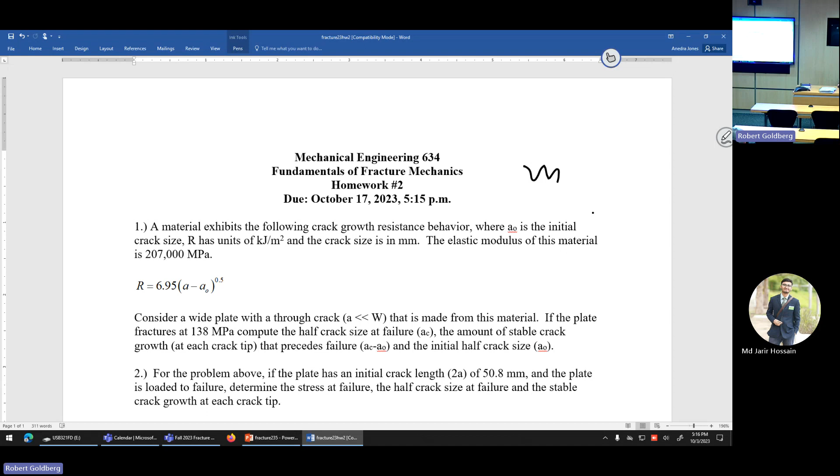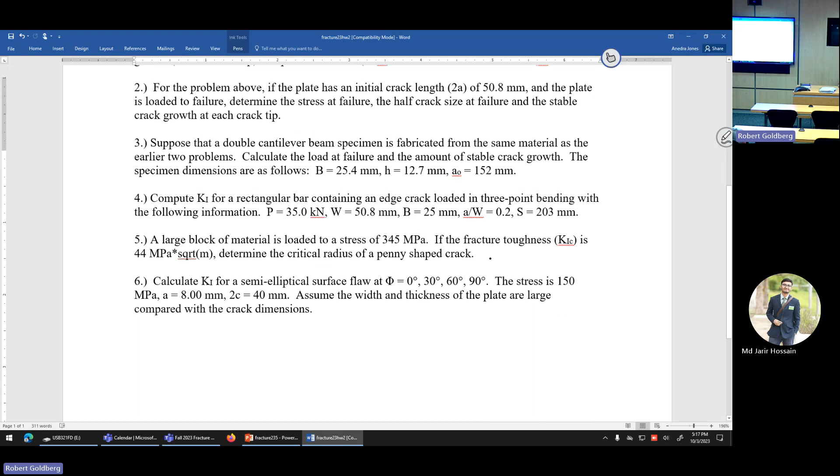I have handed out your homework, due 2 weeks from today. The first couple of problems deal with the R curves and the R ratio we talked about last week. Problems 4 through 6 will be on the stress intensity factor, covering the material related to stress intensity that we'll be discussing today.

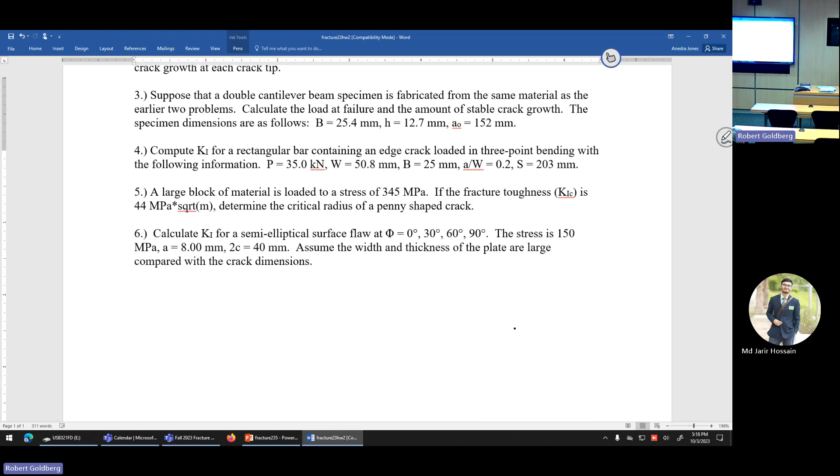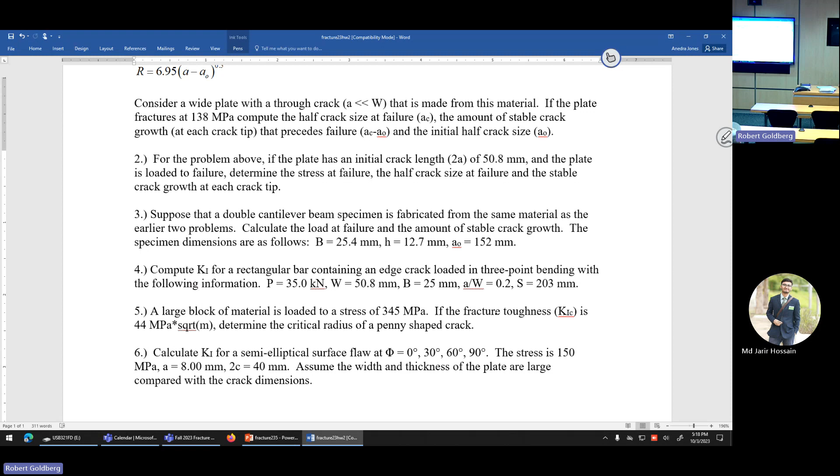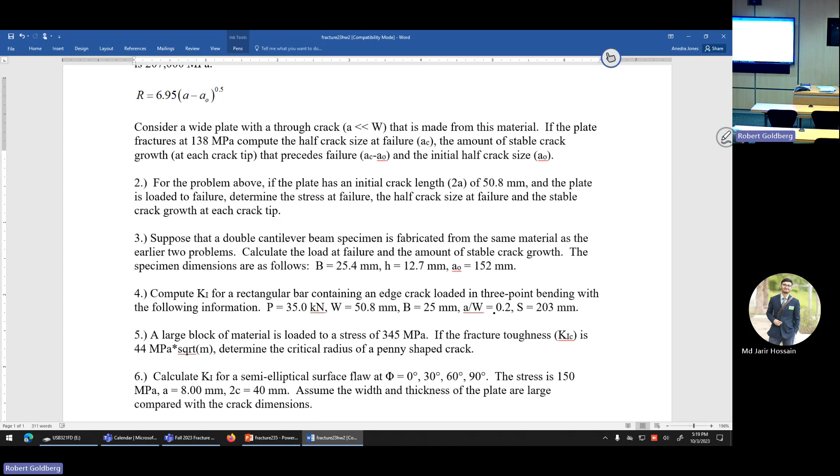In any case, it'll just be the material on the first 2 homeworks covered on the midterm, because I never give test questions on material that you haven't done homework on. Since I'm basically teaching 2 classes, one class's midterm will be the week of the 23rd, the other the week of the 30th. I'm still deciding which will be which week. So for tentative planning, figure the 24th or the 31st will be your midterm. Start checking your calendars, and next week we'll set the date. If someone has business travel or whatever, we will work around it.

The midterm will be during the class period, and even though the class period is 2.5 hours, it won't be a 2.5 hour midterm. The midterm will only be about an hour and a half, maybe an hour fifteen. Also, that will be all for that week - I won't make you sit through an hour lecture and then have to worry about taking a midterm too. That's just not fair.

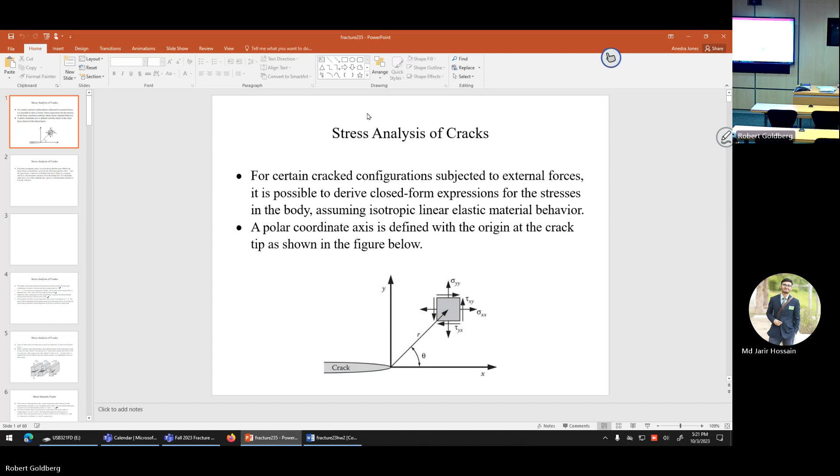Last week we talked about the R curve and the conditions that lead to stable or unstable crack growth. Today we'll be talking about stress analysis of cracks.

For crack configurations subject to external forces, it's possible to derive closed form expressions for the stresses in the body. Like pretty much everything this semester, we're going to assume isotropic linear elastic material behavior. We'll do most of our work in the Cartesian system, but we'll deal a little bit with the polar coordinate system.

We define a polar coordinate axis with the origin at the crack tip, and define any point around the crack at some angle theta from the horizontal, at some distance r from the tip of the crack. For a point at angle theta, distance r, we can define our stress state. Depending on how we apply the loads, we can have a fully populated stress tensor with normal stresses in both directions and in-plane shear stresses.

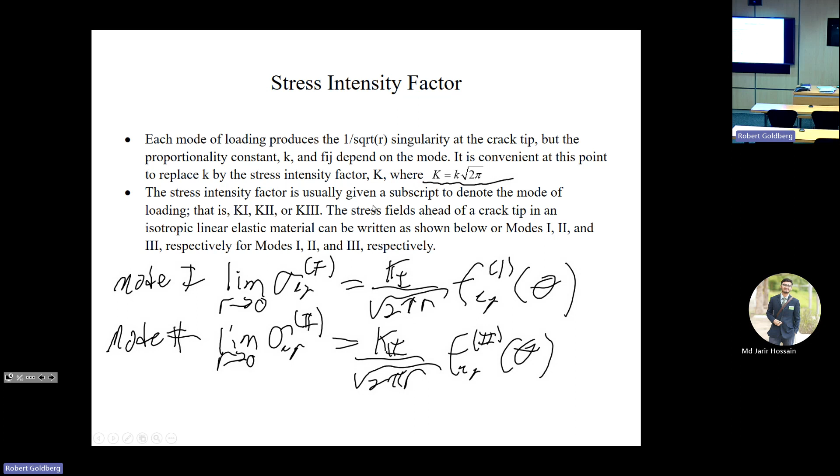And then finally, for mode 3, we have the limit as the radius goes to 0 of the stress associated with mode 3 loading is equal to the mode 3 stress intensity factor divided by the square root of 2 times pi times the radius, times our function of theta appropriate for mode 3.

We say the limit because, as we'll show shortly, these stress expressions around a crack are only valid in the region right around the crack. At some distance away, the crack loses its influence and you just have the far field stress that you apply to the structure.

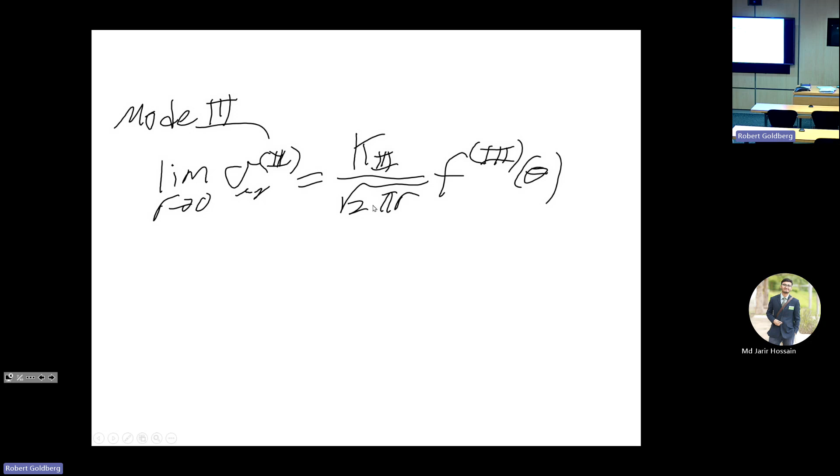For a mixed mode problem where more than one loading mode is present, the individual contributions to a given stress component can be added together. So the total stress is equal to the stress from mode 1 plus the stress from mode 2 plus the stress resulting from mode 3. This is due to the idea of linear superposition—so if you have a multi-axial stress state applied around the crack, you can just take the stress contributions from each of the various modes.

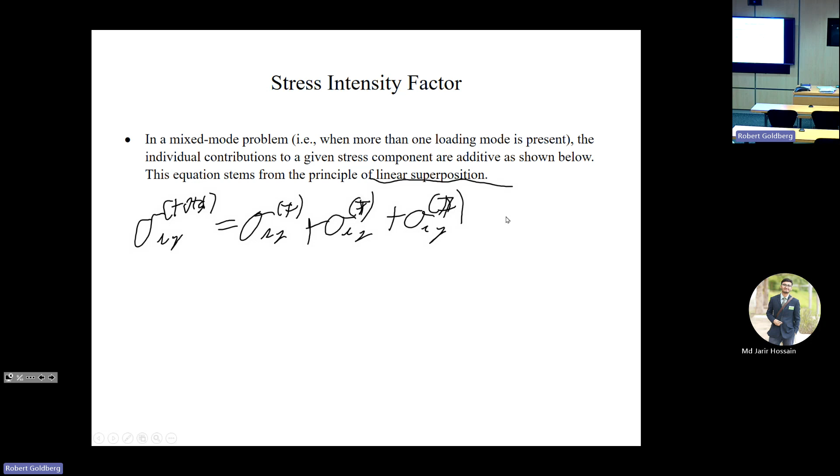So how do we define these stress expressions? This depends on the various modes. The singular stress fields are in Cartesian coordinates, so we can define detailed expressions for the stress in the x direction, the stress in the y direction, the in-plane shear, and—because this is plane stress—the out-of-plane stress is 0 for plane stress, or the sum of the stresses multiplied by the Poisson ratio for plane strain. Our transverse shear stresses are 0.

For mode 1, the stress in the x direction is this expression here: K over the square root of 2 pi times the radius, times our function of the angle theta. And we have similar expressions for the y stress and the shear stress.

For mode 2, we have the various expressions for the stress due to mode 2 loading, and all of these still have that stress intensity factor over the square root of 2 pi times the radius, but the functions of the angle are different.

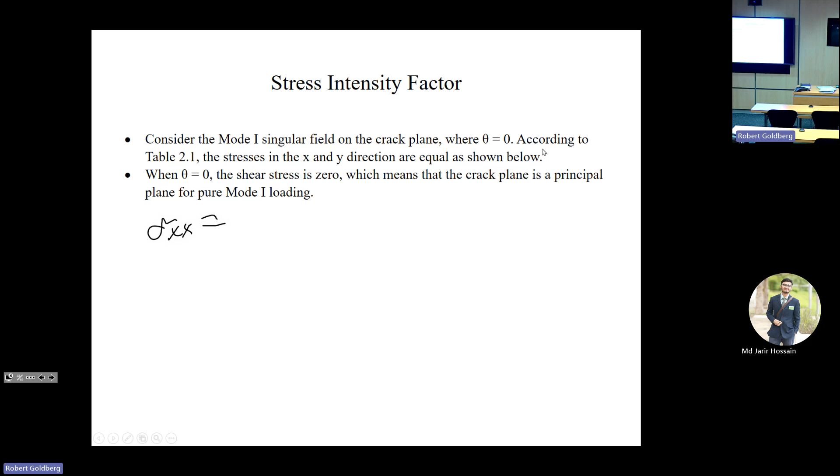So what we have for the special case when theta equals 0 is that our stress in the x direction is equal to our stress in the y direction, and it's just equal to the mode 1 stress intensity factor divided by the square root of 2 times pi times the radius.

And for the shear stress, if we look here, we have sine of 0 is 0. And these are all just multiplicative, there's no one term in here. So when theta is equal to 0, these two terms are 0, which means this whole term is 0. So right around the plane of the crack, we have that our shear stress is equal to 0.

So if we go back to our original here, right along the plane of the crack, if we go back to our little element with the various stresses applied, the x direction and y direction stresses are equal to each other, and the shear stress here is 0.

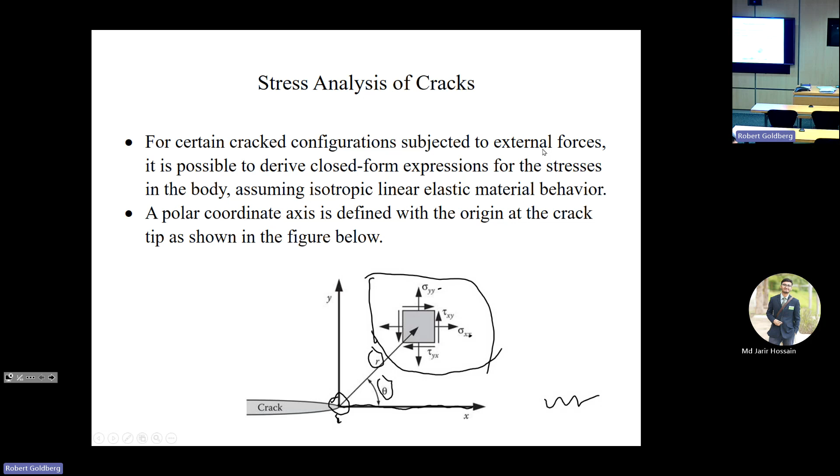So what that also means is, remember when we talked about our review of elasticity theory, we talked about principal stresses as the case where we just have normal stresses and our shear stresses are equal to 0. So what this means is the crack plane, under pure mode 1 loading, is a principal plane. We only have normal stresses, we don't have shear stresses.

Now what we talked about a little bit ago is that all these things we're doing with our stresses, they're only true right around the crack tip. Because if you look at the fundamentals, the stress intensity factor divided by the square root of 2 times pi times the radius, well, when the radius gets big, this term here gets close to 0, so it doesn't contribute things anymore.

So the idea is you have, way out at some infinite distance, some applied stress. So once you get far enough from your crack tip, the only stress that's relevant to the structure is just your far field stress. So the stresses far from the crack tip are governed by the remote boundary condition. So if we have a uniform tensile stress applied horizontally, in terms of this discussion, the stress approaches a constant value.

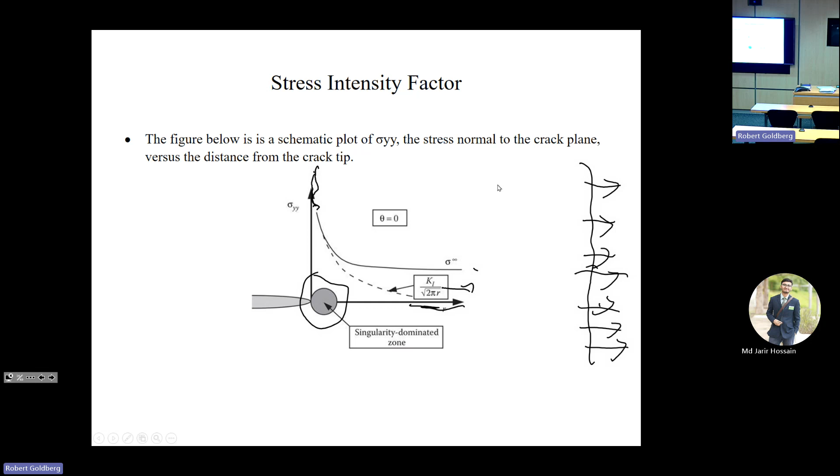It's only in this singularity dominated zone where these stresses are relevant, because this is the area where the radius is small enough that this term starts contributing to the stress. When you're far enough from the radius, your total stress equals your stress at infinity plus your stress due to the crack. It's only when you get sufficiently close to the tip of the crack where this crack term starts getting big enough, growing a little, but it's only in the zone really near the crack where this term starts to dominate and provides a significant contribution to your stresses.

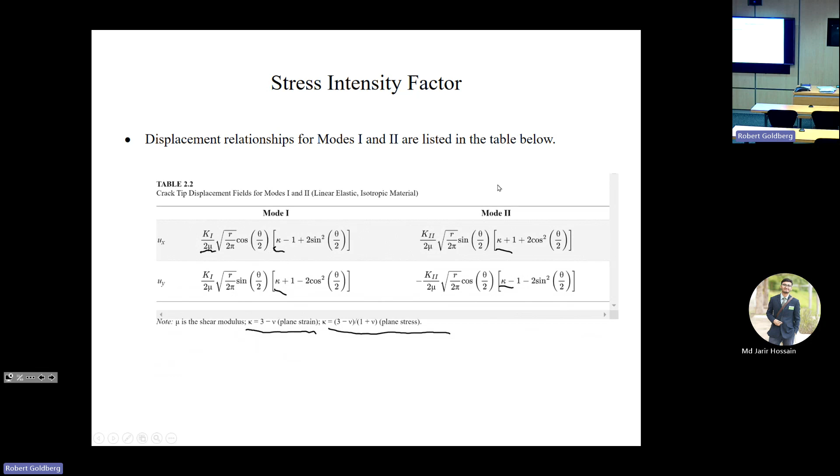So the other thing to note here is the stress - we define the singularity dominated zone, and it's defined nebulously. It's just where these various stresses that we compute using these tables grow large enough that they provide stress levels significantly greater than our far-field stress.

The stress intensity factor completely defines the crack tip conditions. So if you know the stress intensity factor, you can solve all of the components of stress, strain, and displacement as a function of the radius and the angle. The idea that you can use just one single parameter, the stress intensity factor, to completely define the stress state around the crack tip turns out to be one of the more significant and important concepts in fracture mechanics.

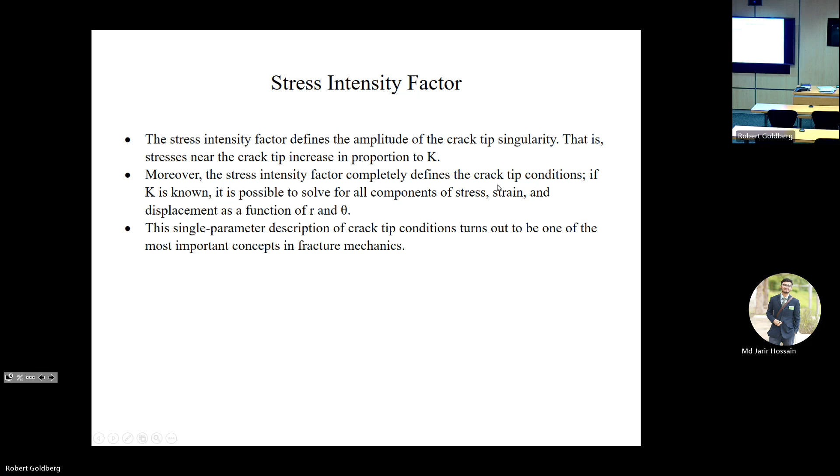So in order for the stress intensity factor to be useful, you need to be able to determine the stress intensity factor from remote loads and the geometry. Closed form solutions for the stress intensity factor have been derived for a number of simple configurations - we're going to go over several of them. Now for more complex situations, one way you can estimate the stress intensity factor is by experiment or numerical analysis.

And also, if you know the stress intensity factor for a couple simple cases, you can take your more complex case and consider it to be a combination of several simpler cases. You can use that idea to estimate your stress intensity factor.

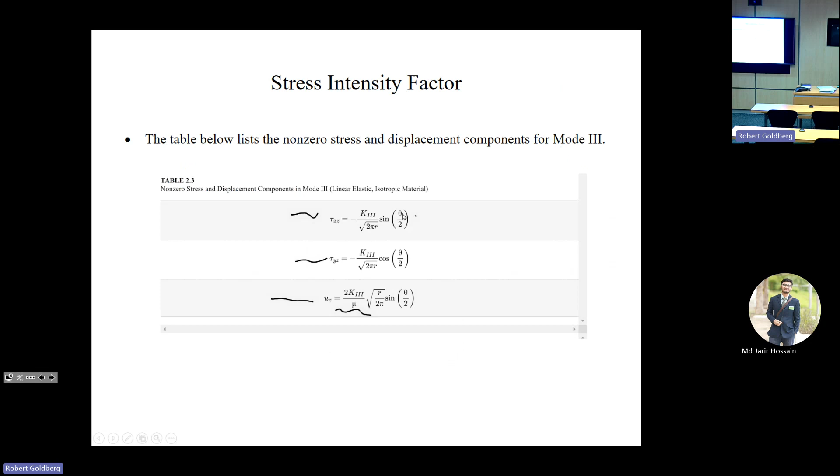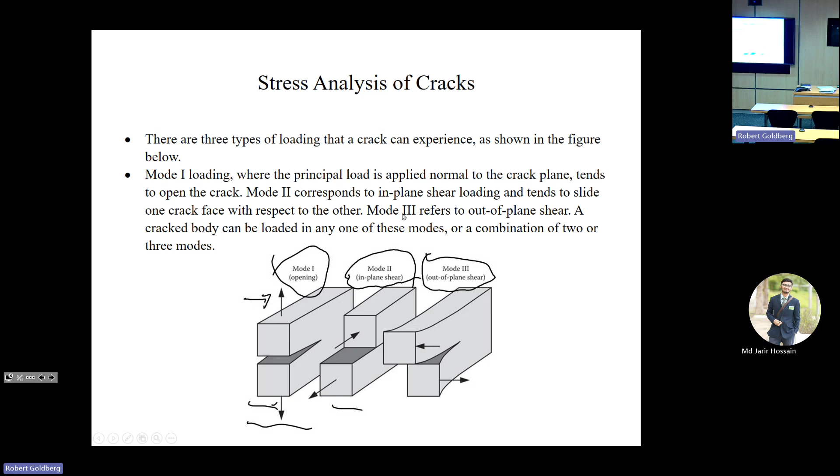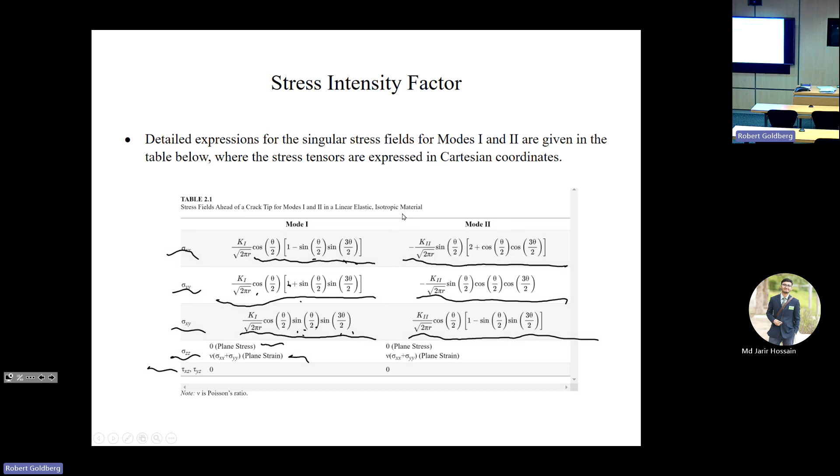And linear elastic bodies undergo proportional stressing. That is, all the stress components at all locations increase proportionally to the remotely applied forces. So as you increase your loading remotely, the stresses all increase by the same proportions, by the same ratios. So the crack tip stresses are proportional to the remote stress, and the stress intensity factor is proportional to the applied stress. If we look at how these equations are set up, the stress intensity has units of stress times the square root of length.

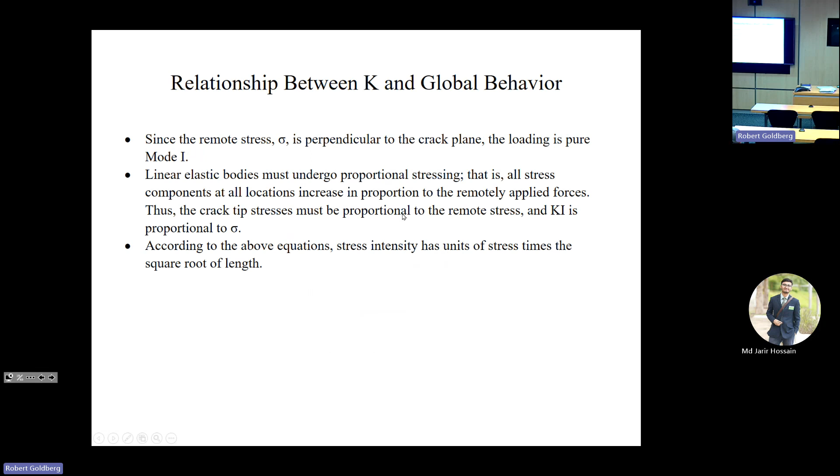So since the only relevant length scale here is our crack size, we can say that our stress intensity factor has the form: the stress intensity factor is equal to some function of the stress multiplied by the square root of the half crack length, because the only length dimension of significance here is the crack length, since we're looking at an infinite plate.

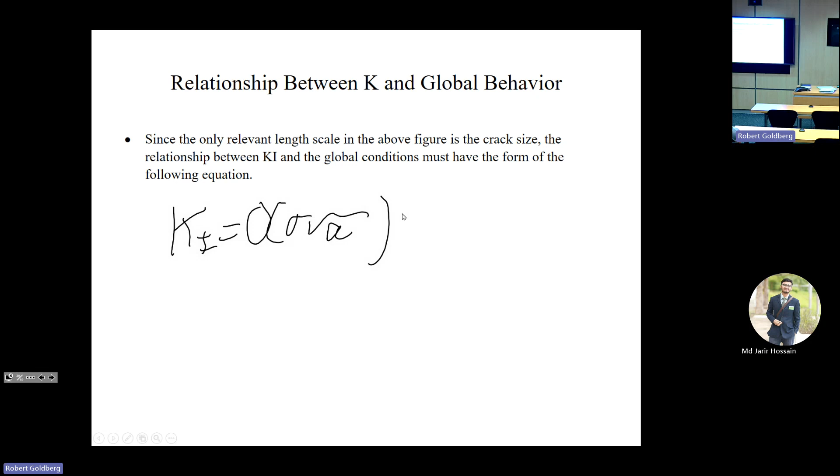So it goes off in infinite directions, vertically and horizontally, so the only length we have to deal with is the crack length, and we always just deal with the half crack length A. The actual solution for this case, which is in one of the appendices in the back of the book, goes through in lots of detail. Using that expression, it can be found that for the infinite plate subject to mode 1 type of loading, the mode 1 stress intensity factor is equal to the stress times the square root of pi times the half crack length. It's a fairly complicated derivation, but you end up with this simple expression.

So the amplitude of the crack tip singularity, the amount that the stresses are multiplied by at the crack tip, is proportional to your applied stress and the square root of the crack size, because pi is just a scalar number. For mode 2, all you do is take this normal stress and replace it with the shear stress, and you get a similar expression. So the mode 2 stress intensity factor is also just proportional to the applied shear stress and the square root of half the crack length.

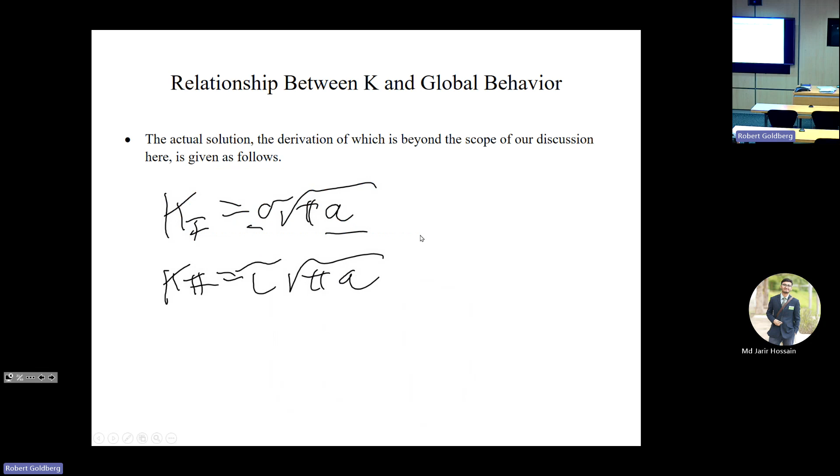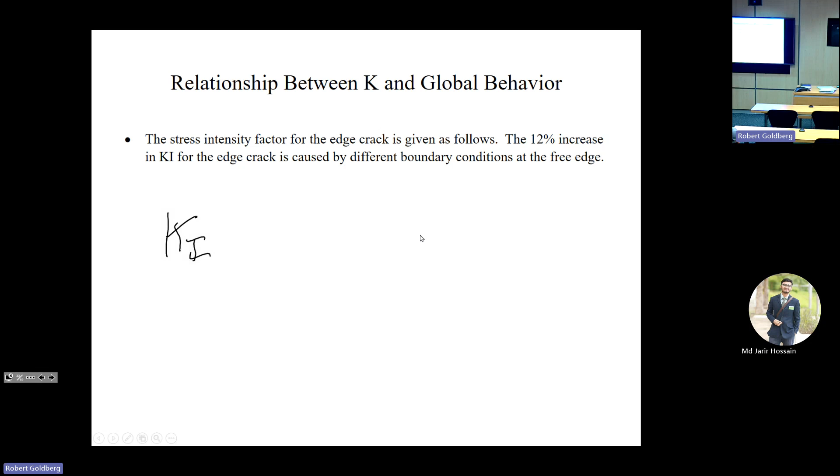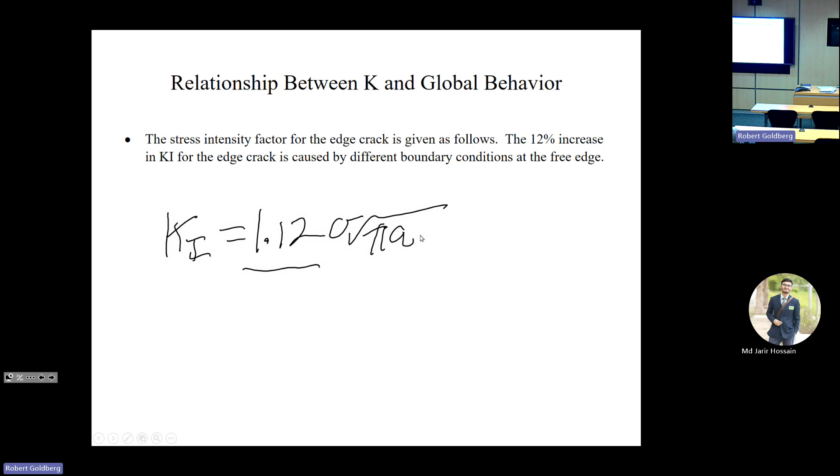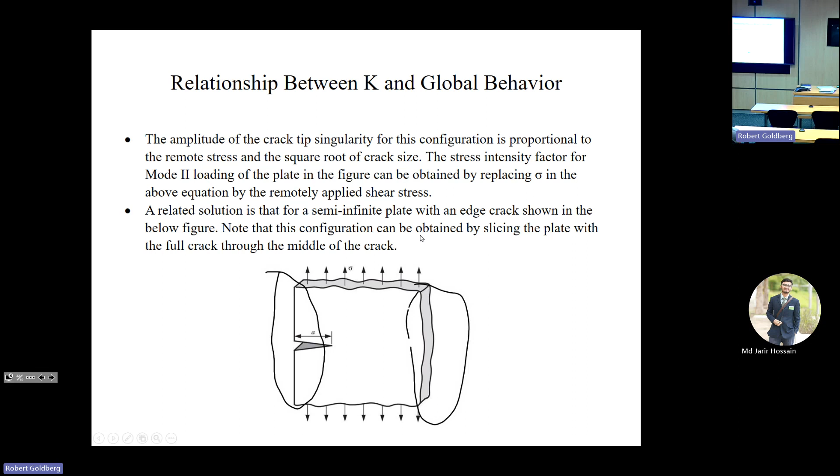You can derive this also, but it's beyond the scope of our discussion. This 12% increase, the 1.12 instead of 1, is because you have different boundary conditions at the free edge. When you have the free edge, you have edge effects which serve to focus your stresses. If you look at this figure, the free edge, because of the interplay of the boundary conditions and edge effects, opens up the crack just a little bit more.

This dotted line is the through crack. For the case of the edge crack, it's less constrained, and it just opens up a little more. So while the through crack forms a purely elliptical shape because we're not constraining this edge here, it allows it to open up just a little bit more. So that's why we get that 1.12. It seems like it's a number just pulled out of thin air, but there is a rationale behind this number.

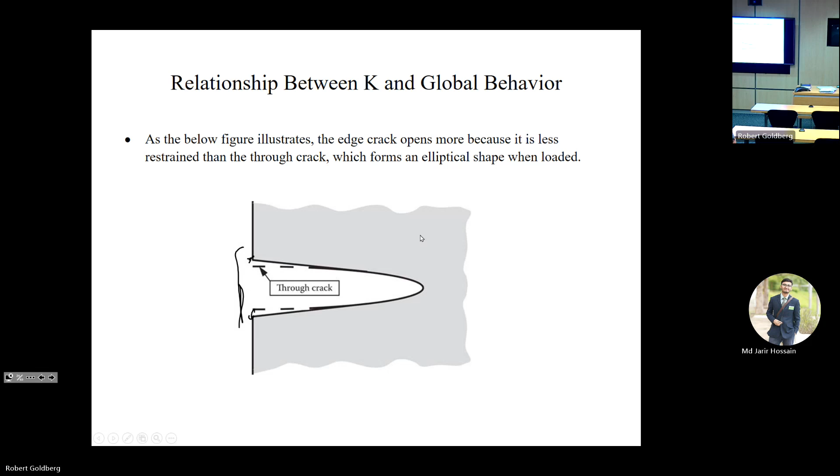Another case we're going to look at is the through crack in the infinite plate, where the normal to the crack plane is oriented at some angle beta to the stress axis. There's no reason why that can't happen. In this case, if beta is not equal to 0, the crack experiences both mode 1 and mode 2 loading.

Because if you look, we talked about these ideas when we discussed principal stresses, this idea of stress transformations, that as far as the crack's concerned, if we transform -- and always remember when talking about stress transformations, the important point is that the actual stress state is the same. All we're doing is changing our reference system.

So we have a system in terms of the crack where we have an x prime axis along the crack and a y prime axis perpendicular to the crack. Even though in our structural or global system we're still only applying this unidirectional stress in the vertical direction, as far as the crack is concerned, along this new coordinate system related to the crack, it's seeing normal stresses along the plane of the crack, normal stresses perpendicular to the crack, and it's also seeing shear stresses.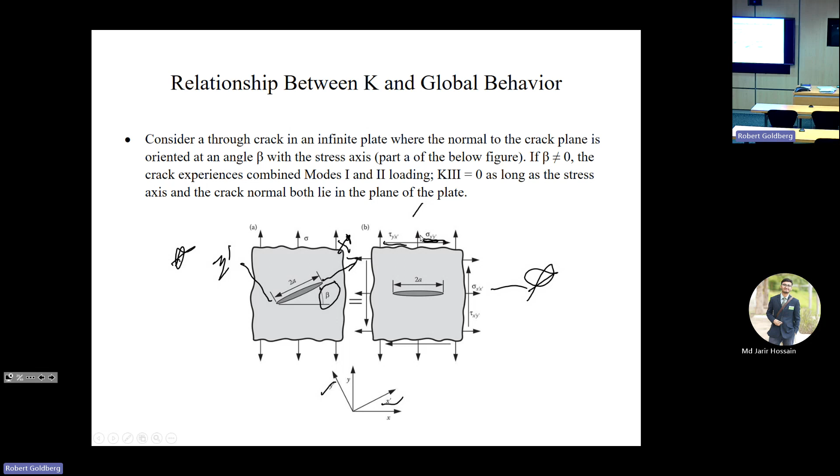So we talked about this: normal stress creates mode 1 loading, shear stress creates mode 2 loading. So the stress intensity factors for the plate - we'll relate the stresses in this rotated system to our globally applied stress. For example, our mode 1 stress intensity factor is our normal stress in the y prime y prime direction times the square root of pi a.

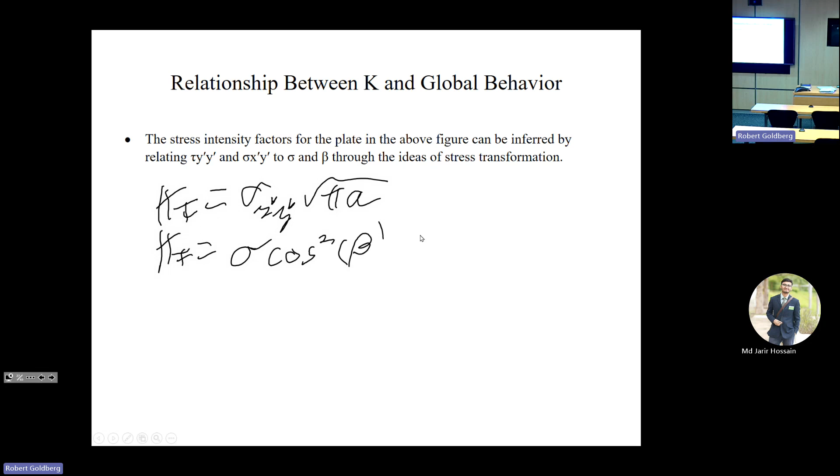If you learned about principal stresses, it also relates to the ideas of Mohr's circle from sophomore strength of materials. If you take continuum mechanics, you'll go into a lot more detail about stress transformations. But with all that being said, we can also say that this is equivalent to our applied stress times cosine squared of our angle of rotation beta times the square root of pi a.

You can say that this stress is just equal to sigma times cosine squared beta. Similarly, we can say that our mode 2 stress intensity factor is equal to our shear stress in our rotated coordinate system multiplied by the square root of pi a. But with our stress transformation, we can say that this stress is equivalent to our applied stress times sine of beta times the cosine of beta times the square root of pi a.

So we don't need to explicitly compute the stresses in our rotated system, even though we can with our stress transformation equations. Just by knowing the angle of rotation and the far field stress, we can compute what our mode 1 and mode 2 stress intensity factors are for the case of a rotated crack.

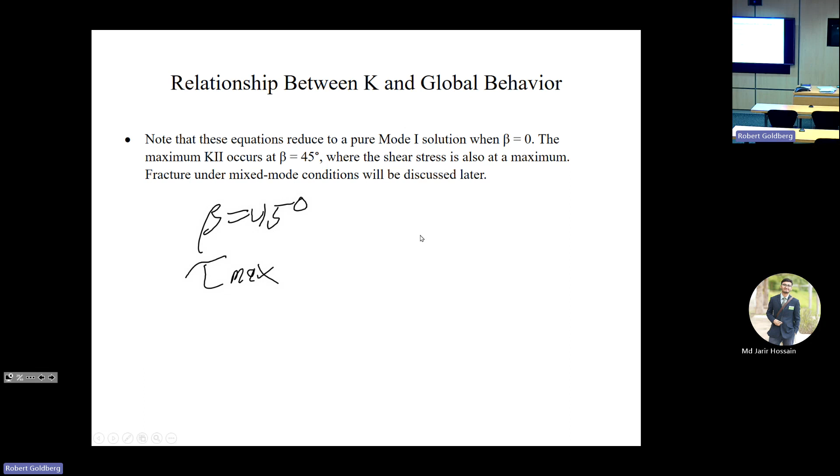Plus, you might have learned in some of your classes - it's beyond the scope of this class - but you can find that the shear stress is a maximum at an angle of 45 degrees. So if the shear stress is a maximum where beta equals 45 degrees, the mode 2 stress intensity factor is also a maximum at beta equals 45 degrees. This is just an introduction - we're going to later go into more detail on what happens under mixed mode fracture conditions.

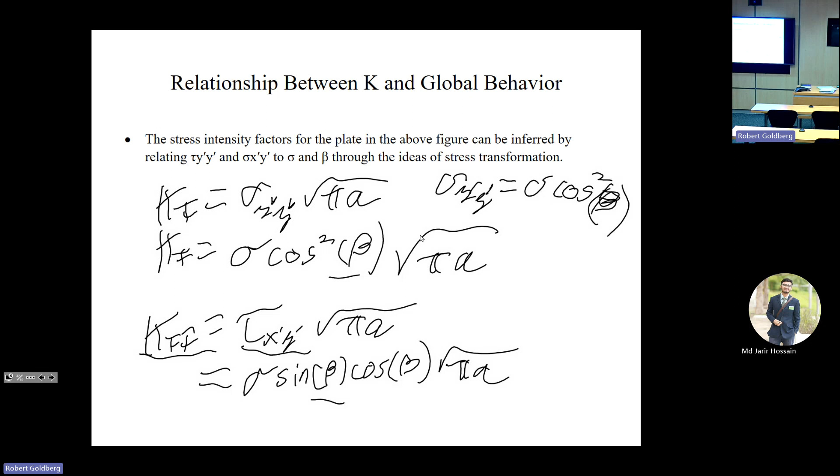And the last point we'll talk about before we take our break is another simple configuration: a penny-shaped crack in an infinite medium. So here we have a bit more of a radius - it's a penny-shaped crack.

It just looks elliptical because of the plane. Imagine a circular penny-shaped crack in the middle of your structure, with the radius of the penny equal to A, and the radius of your circle equal to A. For that case, our mode 1 stress intensity factor is equal to 2 divided by pi, times sigma, times the square root of pi times A. This equation has the same form as the previous relationships for a through crack, except instead of the crack length being our characteristic length, now it's the radius of our penny-shaped crack that forms the basis of our length.

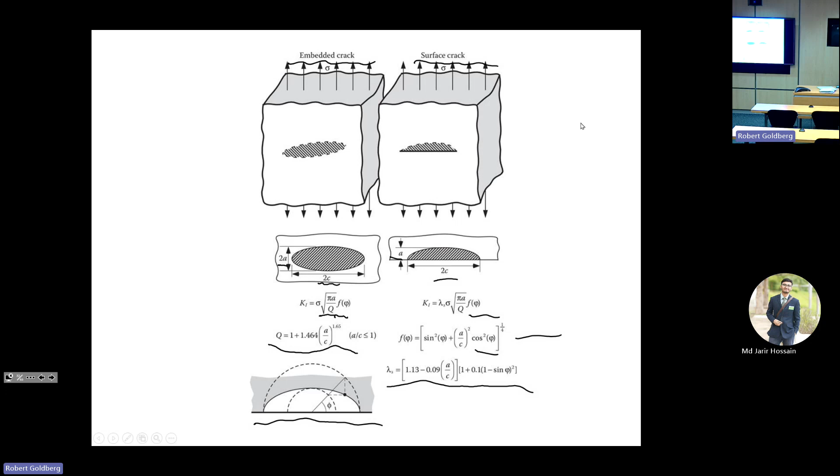And we did talk about the one case of an edge crack where we did specify one of the edges. This is fine when the dimensions of the crack are very small with respect to the dimensions of your structure. But there's also...

So most of our configurations consist of a crack with a simple shape, either a rectangular crack or an elliptical crack in an infinite plate. The crack dimensions are small with respect to the size of the plate, and our crack tip conditions aren't influenced by the external boundaries.

Now, in a lot of real structures, first of all, as your crack size grows, it could be getting closer to the edges of your structure, or if you're looking for a crack in a smaller plate, all of a sudden your outer boundaries can begin to exert an influence on the crack tip.

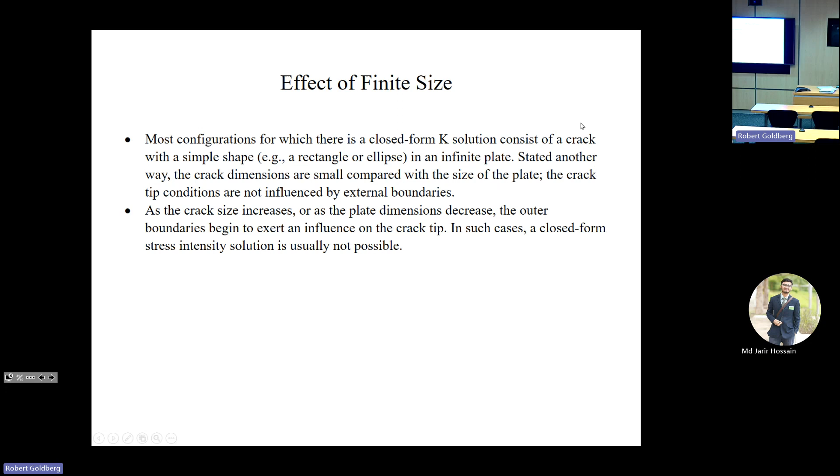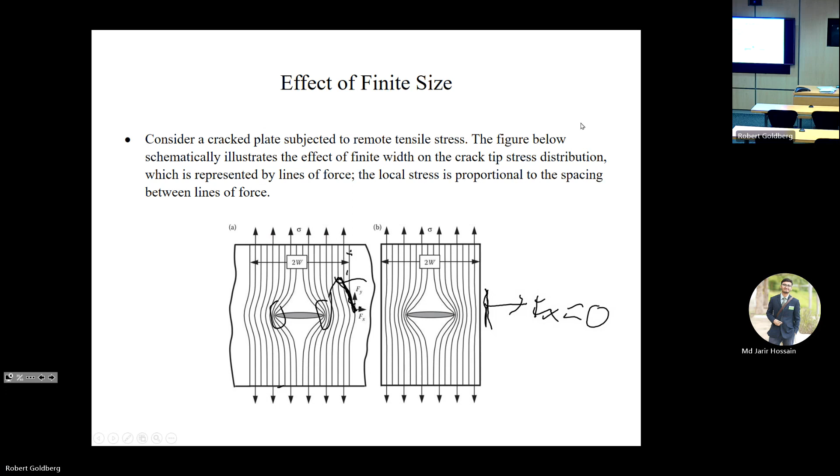So one way to approximate this finite width boundary condition is to represent the same thing where, if you still look at our infinite plate, you look not at just one crack, but a series of collinear cracks in the infinite plate. This way, when these cracks interact with each other, you get kind of the same effect as you do with the finite width plate.

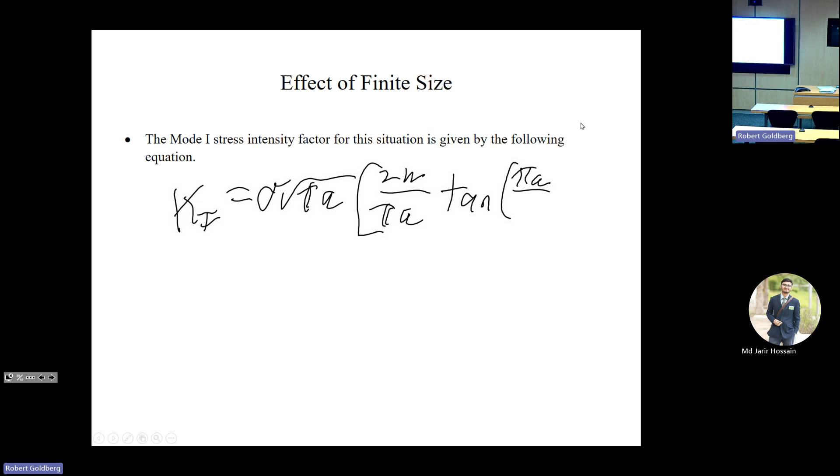And what you can do then is solve and derive that for this case of collinear cracks, our mode 1 stress intensity factor is still sigma times the square root of pi a, but now we have a correction factor of 2w divided by pi a times the tangent of pi a divided by 2w, all to the 1/2 power. So this is our correction for this case of collinear cracks.

Now the thing to look at here is that as this A over W ratio goes to 0, the tangent of 0 is 0. So as A over W goes to 0, this becomes 0. Even though W over A still goes to infinity, if this term is going to 0, 0 times anything is still 0. So you end up with the infinite plate solution of just sigma times the square root of pi a as A over W goes to 0.

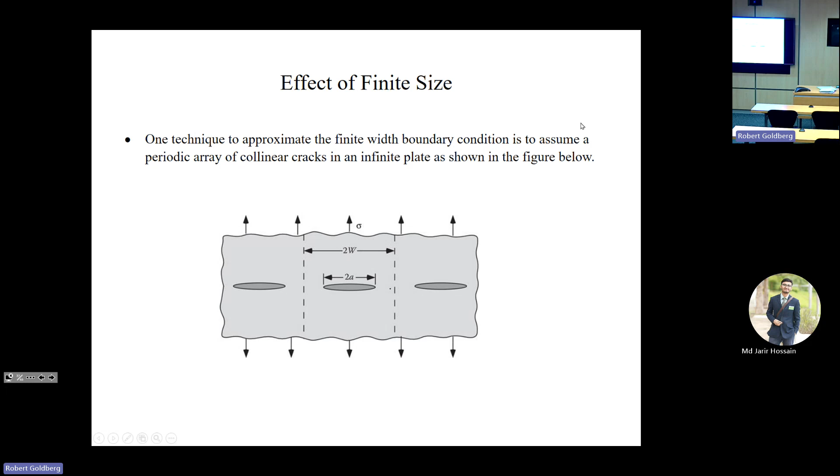And conversely, as A over W goes to 1, basically you get to the point where the crack is right up against the edge of the plate, or in this case where we have the cracks practically touching each other, then the tangent of 90 degrees is infinity, so that leads to our singularity. That means our mode 1 stress intensity factor is asymptotic to the case where A over W equals 1.

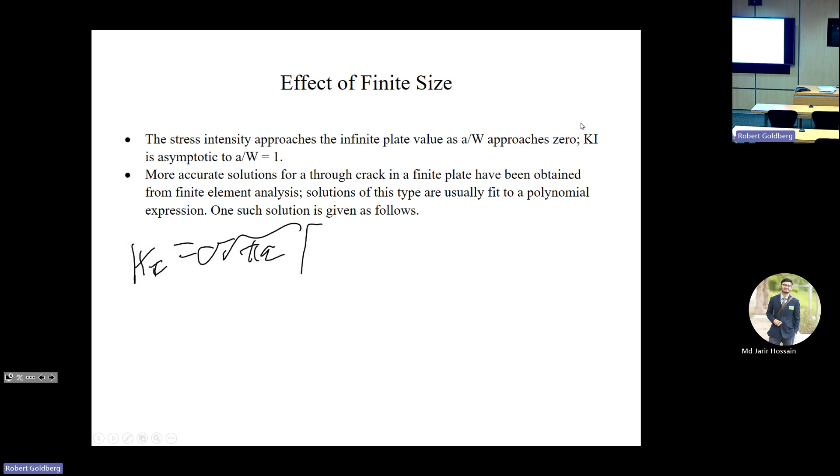Now, more accurate solutions for a through crack in a finite plate have been obtained from finite element analysis, and solutions of this type are fit to polynomial expressions. One example obtained in the literature is sigma times the square root of pi a times the secant of pi a over 2w to the 1/2 power, multiplied by a term of 1 minus 0.025 times a over w squared, plus 0.06 times a over w to the 4th.

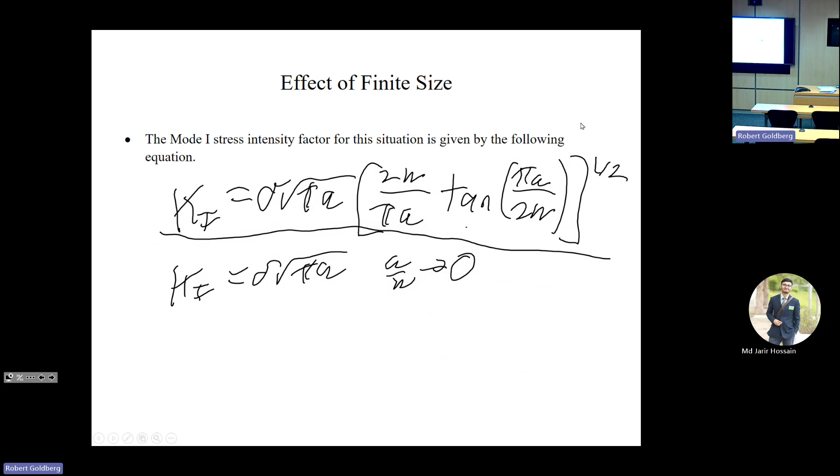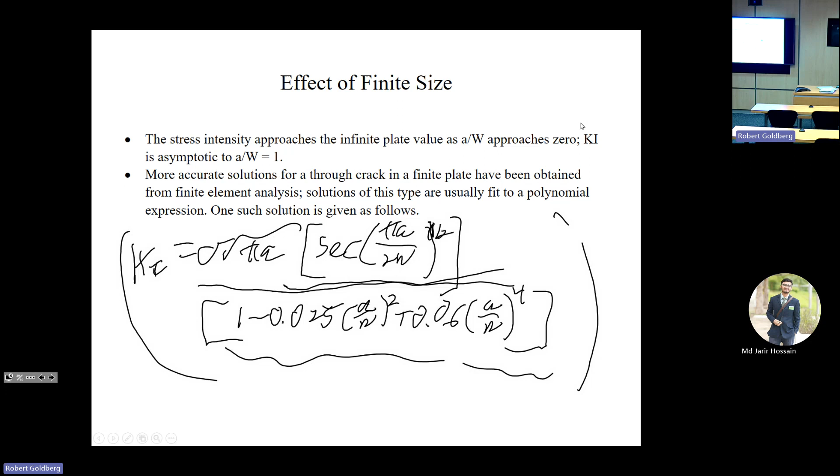And if you're just doing hand calculations, you can neglect it. So basically, for all practical purposes, you can either use the tangent equation or the secant part of this equation and get reasonable approximations for your finite width mode 1 stress intensity factor.

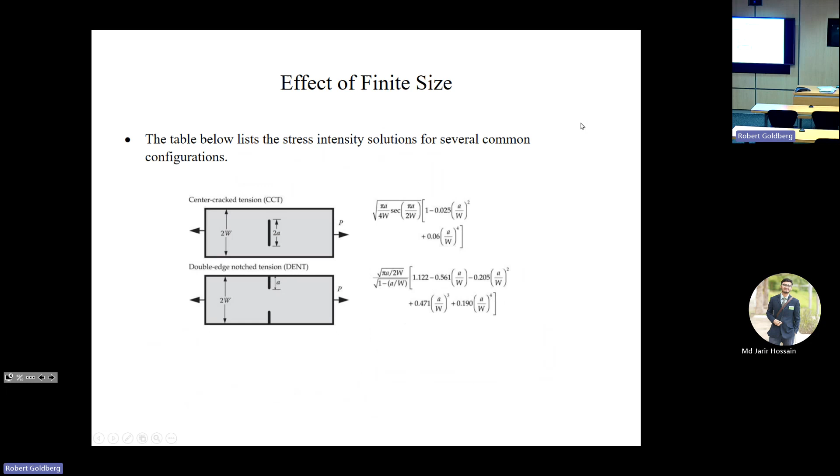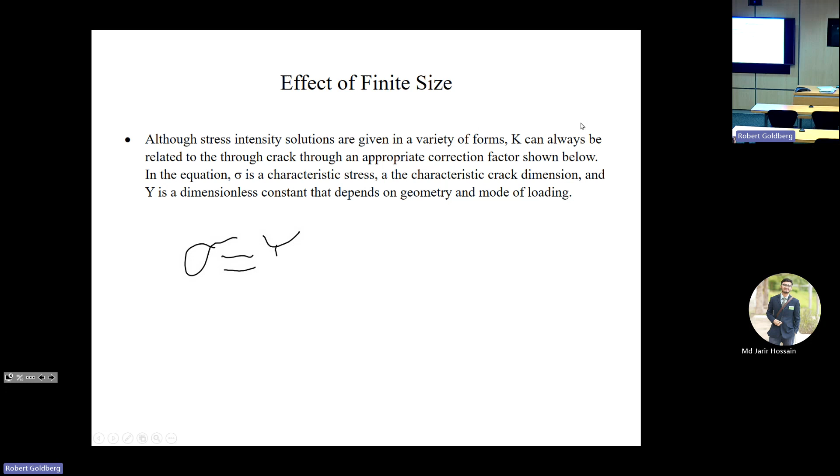So although stress intensity solutions are given in a variety of forms, they're always ultimately the same underlying equation. I forgot to put this equation in the notes, but I'll write it out here quickly before class.

So our stress intensity factor, for modes 1, 2, or 3, is equal to sigma times the square root of pi a times some correction factor. Sigma is our applied stress, a is the characteristic crack dimension, whether it's half the crack length, the radius of the crack, or the major radius of the ellipse - some characteristic length of our crack. And this dimensionless factor is our function of A over W, which is dependent on the geometry and the mode of loading. So everything's basically the same; it's just that, depending on the type of specimen you have, you can have these complex expressions related to the crack geometry and the specimen geometry.

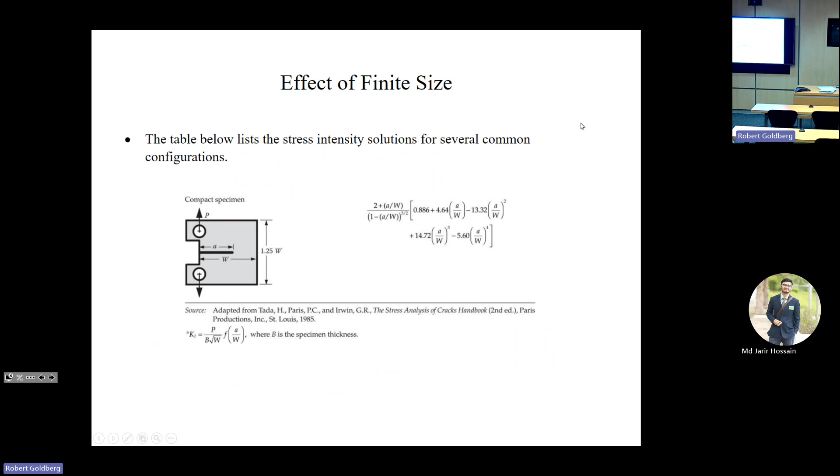We're actually going to show for our single edge notch tensile panel that when A is much less than W, for the case where the plate is really, really wide relative to the crack, we end up with our mode 1 stress intensity factor equal to 1.12 times the stress times the square root of pi a. So we're going to show that for the case where A is much less than W, this whole complicated expression reduces to a very simple number.

So what we do, as we talked about, for all of these expressions, is it's equal to load divided by the thickness times the square root of the width, times our function of A over W. Now we can play a little bit of a math game: we're going to take this P over B times the square root of W times our function of A over W.

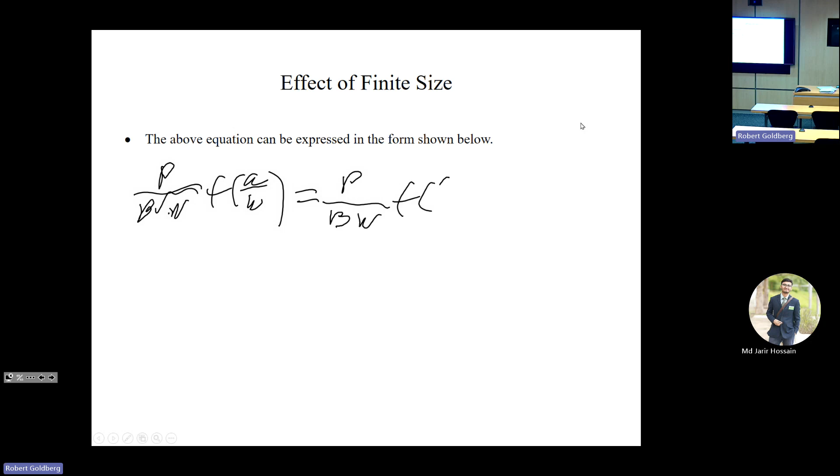We're going to say it's equal to P over B times W times our function of A over W, times the square root of W over pi times A, times the square root of pi A. Now this is all math games, but if you look, W divided by the square root of W is the square root of W.

Multiplying and dividing by the square root of pi A, we can look at B times W, the thickness times the width, which equals the area. So B times W equals the area, and thus force over area equals our stress. We can say that P over B times the square root of W, times our function of A over W, equals some parameter gamma times sigma times the square root of pi times a, where gamma equals our function of a over w times the square root of w divided by pi a.

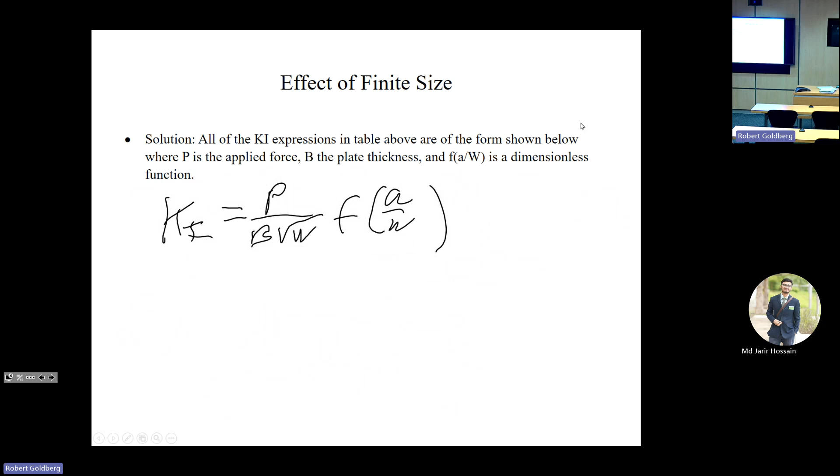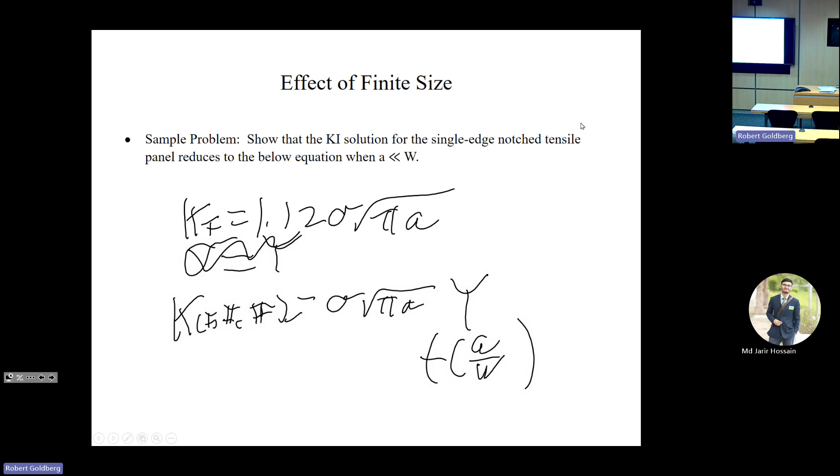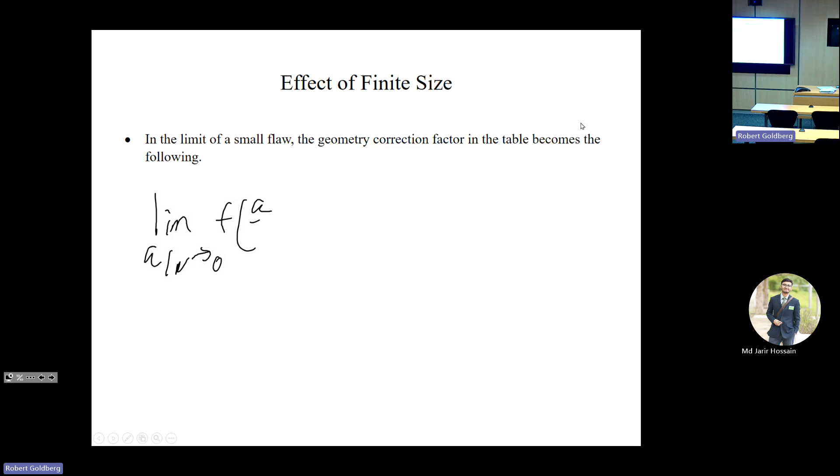So in the limit of a small flaw, our limit as a over w goes to zero of our function of a over w is equal to the square root of pi a over w times 0.752 plus 0.37.

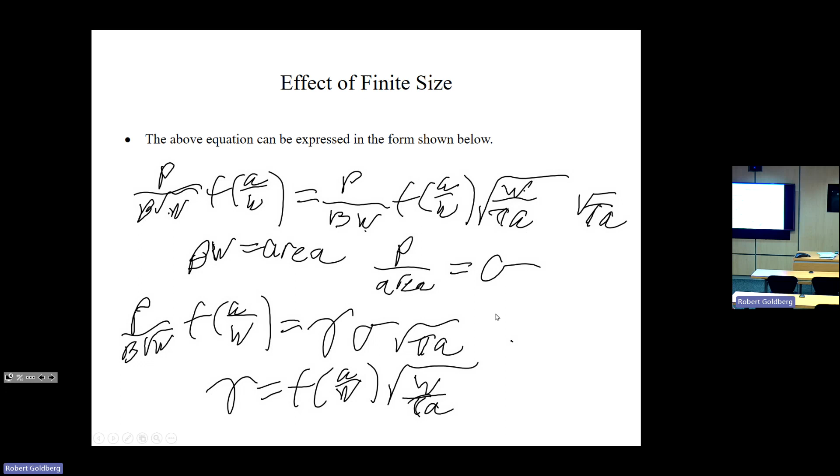And therefore, our limit as a over w goes to zero of this gamma term -- going back here, our gamma term was the function of a over w times the square root of w over pi a. So this is our limit of gamma as a over w goes to zero, and this is equal to 1.122, because we had the square root of w over pi a, and we take the pi a over w to get rid of this term, leaving just the 0.752 and the 0.37 from the expression above.

Okay, so the last big thing we're going to go into a little detail on today is the principle of superposition. For linear elastic materials, individual components of stress, strain, and displacement are additive. If you have normal stresses imposed by different forces, you can add them to obtain the total normal stress in the x direction, but a normal stress can't be summed with a shear stress. Similarly, stress intensity factors are additive as long as the mode of loading is consistent.

So we can say that our total stress intensity factor equals the mode 1 stress intensity factor from loading A plus the mode 1 stress intensity factor from loading B plus the mode 1 stress intensity factor from loading C. But we cannot say that the total stress intensity factor equals the stress intensity factor from mode 1 plus mode 2 plus mode 3.

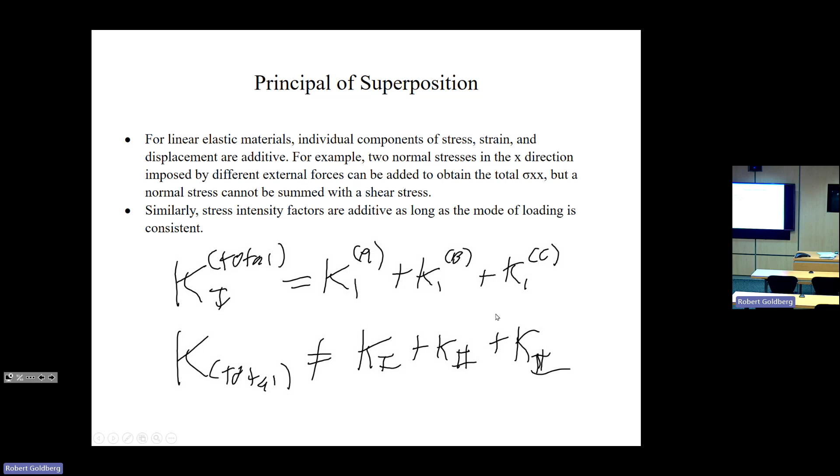So in many instances, the principle of superposition allows stress intensity solutions for complex configurations to be built from simple cases. We've had all these tables and charts where we've done stress intensity factors for simple cases. Real life isn't always a simple case, but the idea of the stress intensity factor is that it allows us to look at more complicated situations and build them up from simple problems that we know how to do.

So for example, consider an edge-cracked panel subject to both combined axial loading and three-point loading. Now, we had equations for the case of an edge-cracked panel subject to tensile loading, and we have an edge-cracked panel subject to 3-point bending loading.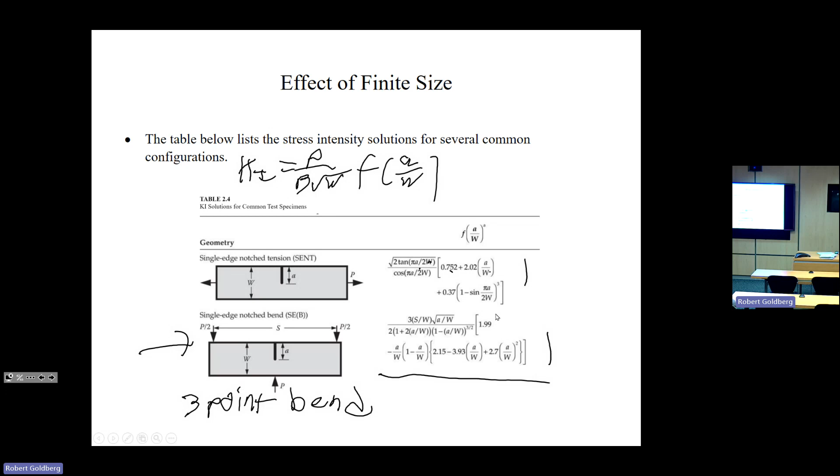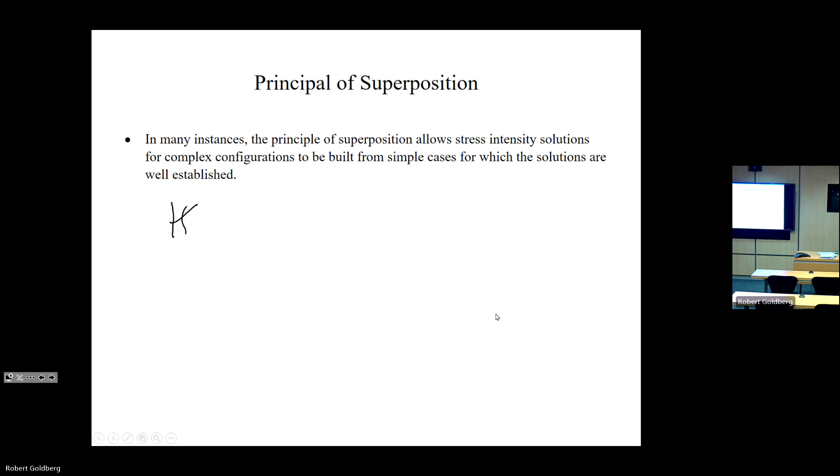So what we can do is say that our total K1 is equal to our K1 for the membrane loading plus the K1 for the bending loading.

And so it's equal to 1 over B times the square root of W times our membrane load times our function of A over W for the case of the edge cracked under tensile loading, plus the membrane load, the 3-point bending load, times our function of A over W for the case of 3-point bending. And we take these, add them together, divide by the thickness and the square root of our W term, and we have our solved problem. Okay.

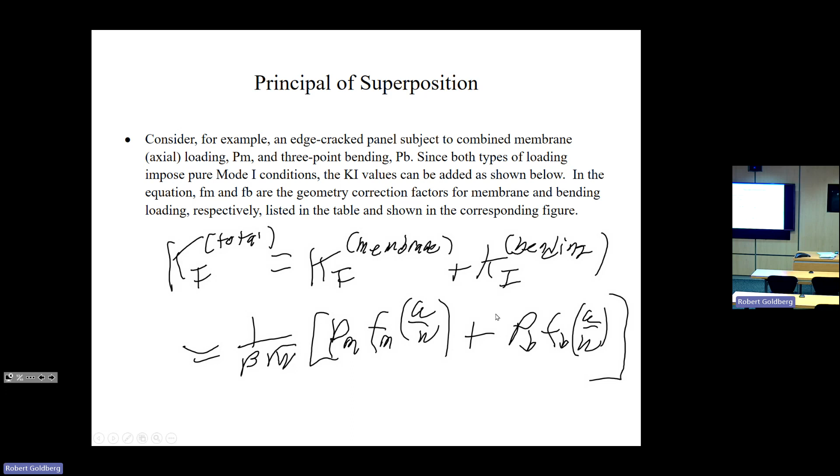So what we have is a semi-elliptical surface crack subject to an internal pressure. This is not something we've talked about. We've talked about a semi-elliptical crack subject to a far field loading, but not a semi-elliptical crack subject to just loading right along the cracked edge.

So what we do is we apply the principle of superposition. We know the solution for a semi-elliptical crack subject to remote tension. We did that. But what we can do to get the equivalent point is say that this far field loading can be transferred down, and if we take this condition and impose a uniform compressive stress on the edge of the crack, the stress intensity factor goes to 0 because the crack face is closed and the plate behaves as if the crack wasn't present.

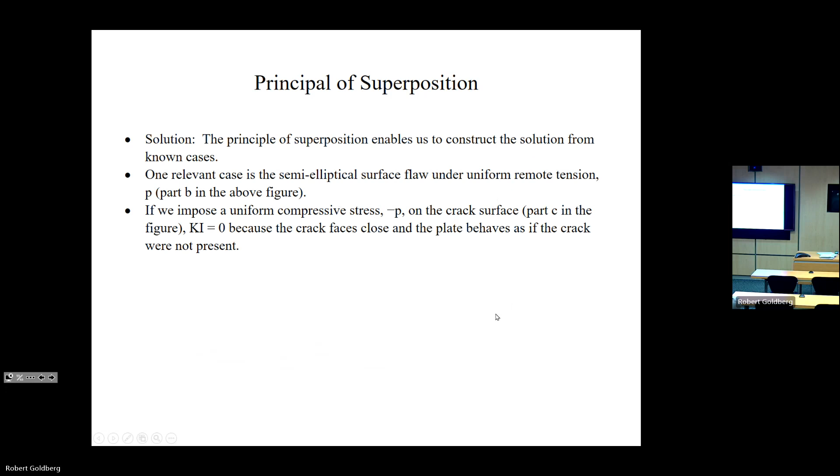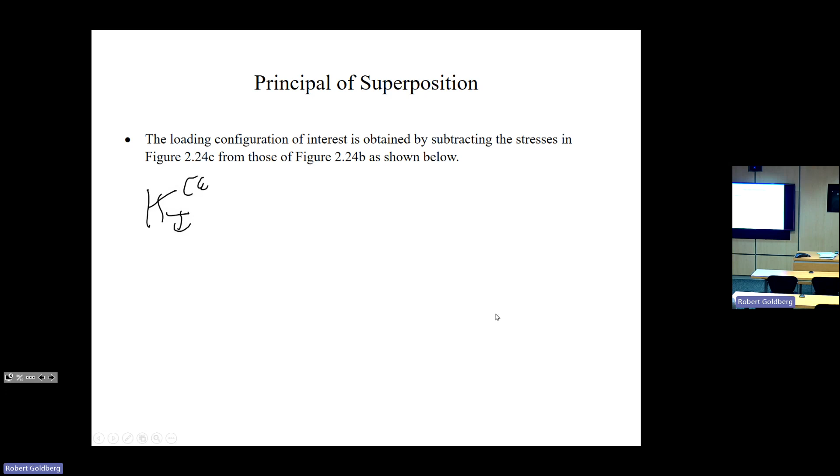So what we do is subtract this from this. And we can say that our K1 for our condition A is equal to K1 from our condition B minus K1 from condition C.

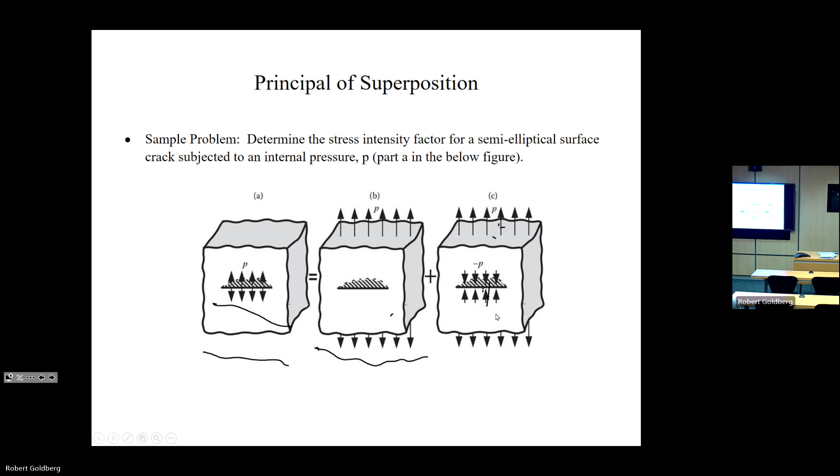And because it's subtracting, these P's cancel out, and these P's cancel out, and this negative p, we subtract a negative, and it becomes a positive load on the edge of the crack. This is equivalent because we have the positive p going in here and the negative p going in here. So effectively it's a zero loading condition.

So what we say is that this is equal to our edge correction factor times our load times the square root of pi a over q times our function of the angle minus 0, which is just equal to our p times the square root of pi a divided by q, times our function of phi.

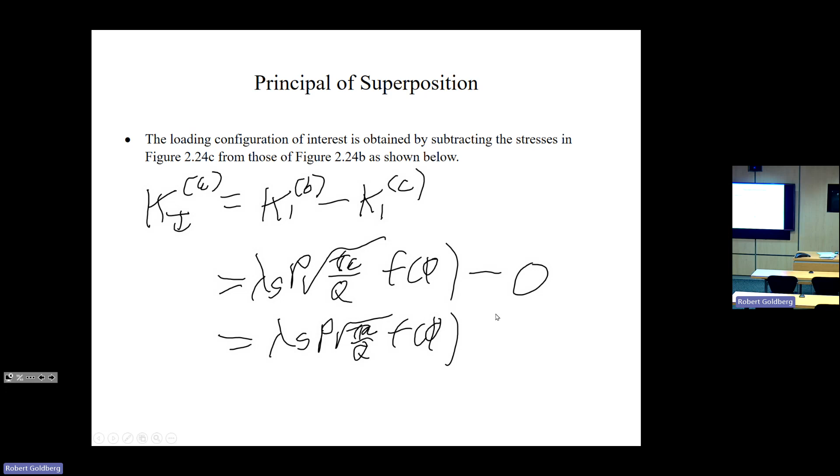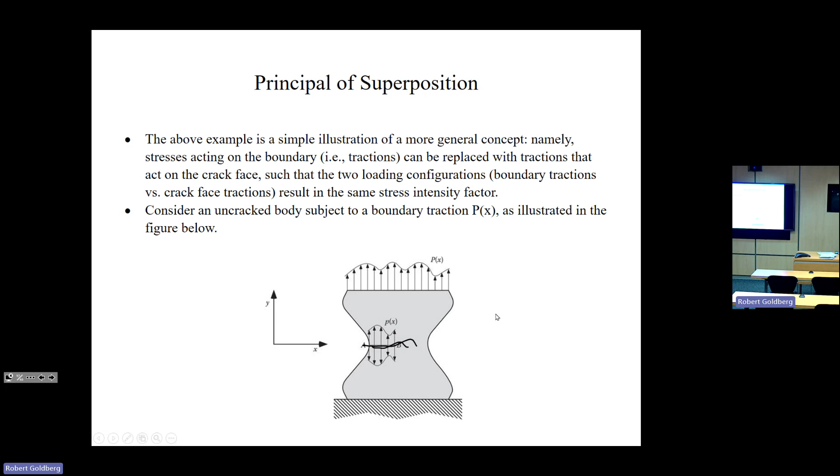And thinking about it, I actually like this example better than the sample problem we just did a minute ago, because this explains it better. But it's all the idea that this is a case where we were able to take the load on the crack face and transfer it to something we know. And in general, the idea is that we can take conditions that are different from how we encountered them and work to transform them into combinations of conditions that we have specified handbook solutions for.